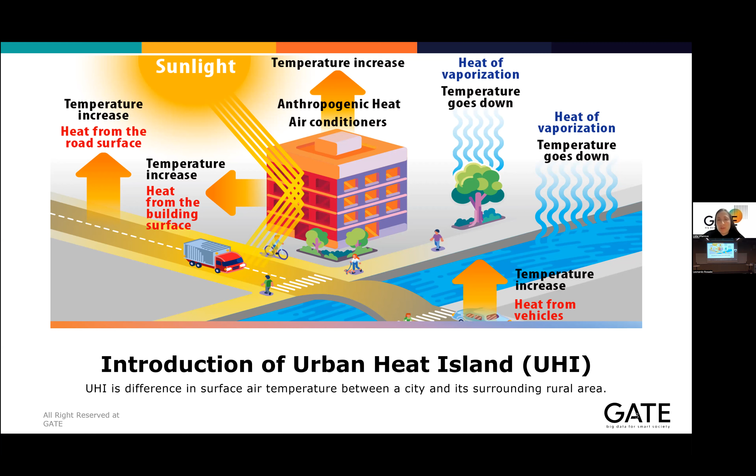So maybe all of you know about this phenomenon or problem related to the urban heat island. Actually, urban heat island is a phenomenon that we can consider as the difference in surface air temperature between a city and the surrounding rural area. So what are the main factors that influence urban heat island? There are a lot of factors that we can consider.

One of them is the heat generated by human activity, rise of energy consumption, traffic increase, reduction of green space and parks. Also, when we have increasing urban development or lack of water bodies, some poor urban planning, we have also increasing local temperature. Another problem is overpopulation, poor use of common and unused areas, use of inappropriate building materials, and last but not least, the influence of the local climate and topography.

Actually, this is a key point because when we try to investigate some problem in the city area, we have to start from the basic or unique point in the city. That's why this last part, influence of local climate and topography, is very important when we try to investigate the temperature or some problem in the urban area.

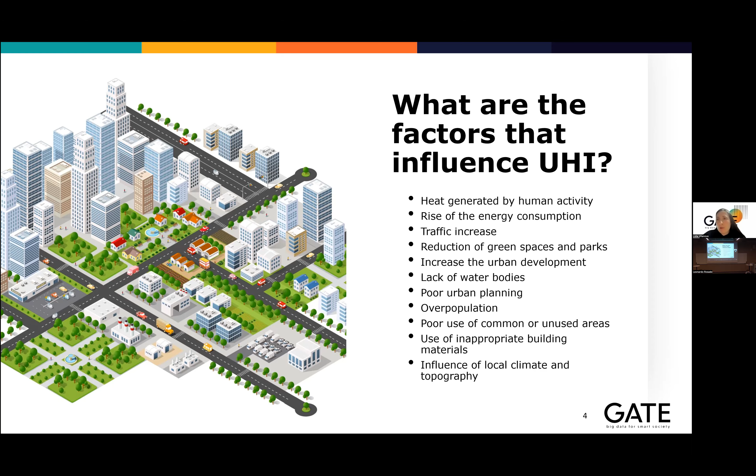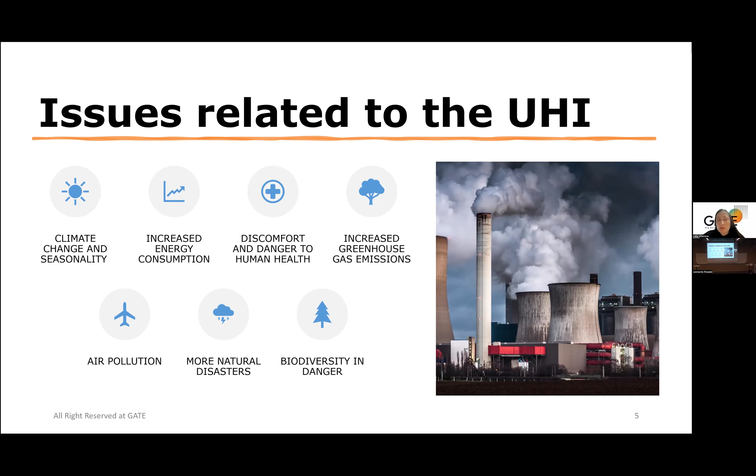So issues related to urban heat island: unfortunately, we have climate change and seasonality changing due to increasing temperature and global warming, increased energy consumption, discomfort and danger to human health, not only in the summer but also in other seasons. We have more and more cases of heat stroke, increased greenhouse gas emission, air pollution. We have more natural disasters. Many studies have already shown that because of the urban heat island and increasing temperature, we have increasing precipitation and natural disasters, and also biodiversity in danger.

That's why the important thing is that we first understand the basic temperature, the problem that already exists. And based on this existing problem, we try to investigate more deeply and in detail the study case in our city. So this research focuses on the capital of Bulgaria, Sofia city. We try to numerically estimate the urban heat island, not only in all of Sofia, but also in each neighborhood.

So another unique point in our study is that we don't consider temperature as just temperature. We think the temperature consists of, for example, the impact of energy consumption by buildings, impact of energy consumption by traffic, impact of the land use, of the population. So we try to consider all of these impacts separately in order to understand what happened in our city.

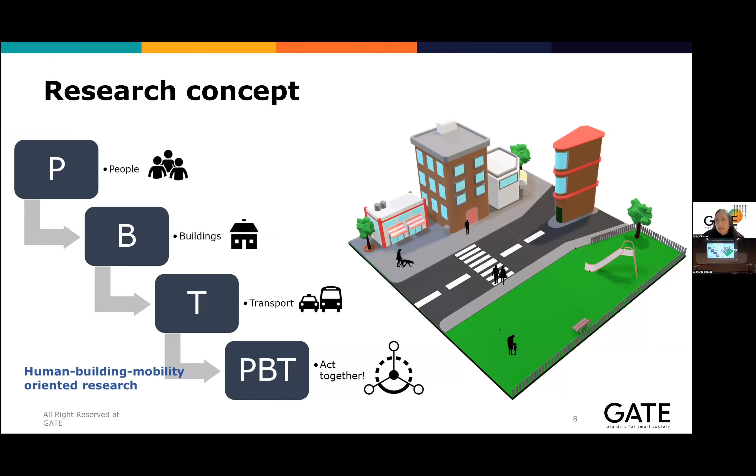So first about results, this is for the people. Before we try to make some simulation, before we try to get some result, it's important we investigate the current situation in our city. That's why we try to create the land use map. This land use map we get from the Copernicus project. This data used for the land use map is gathered from two sources.

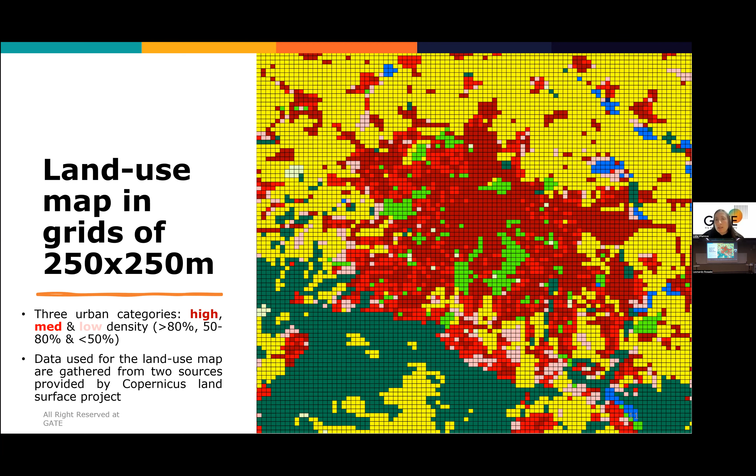And in this land use map, that is 250 meter resolution, we already categorize our urban area in high, medium, and low density area. Then another input data we're using is the building data. Actually, this is the first atlas in Sofia that we have created, 2D distribution, high energy scenario. We already created a low, high, and medium scenario. And the idea of this atlas is first to see what is the energy consumption of the whole city, depending on the different type of the building.

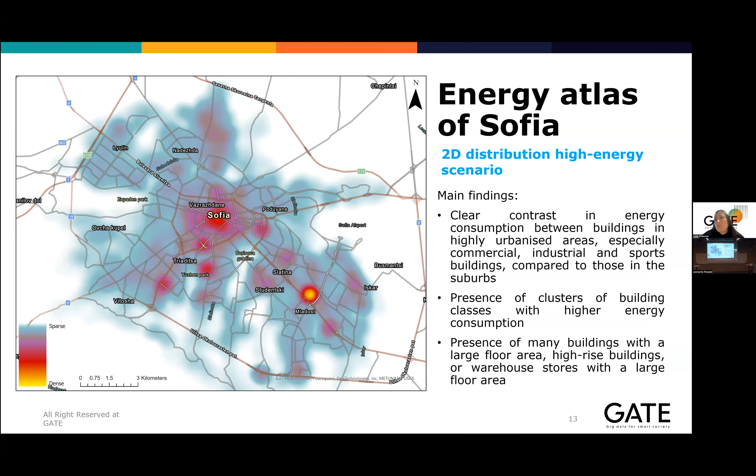And then we focus on some specific area. For example, in the central area, we try to see where is the hotspot in the building energy consumption, depending on the type of the building. For example, we try to analyze what kind of building there is in the area, what is the age of the building, what material they are made of, what is the main cause for the energy increasing. Because this is very important when we try to simulate the model in order to investigate urban heat island, and because there is already a known connection between energy consumption and the temperature distribution in the city area.

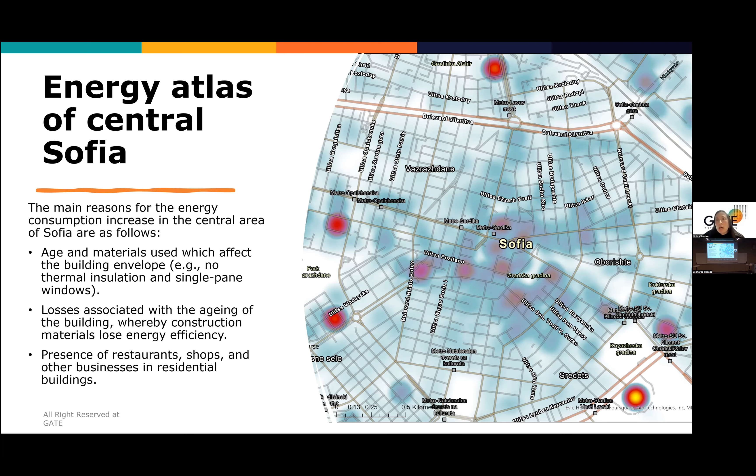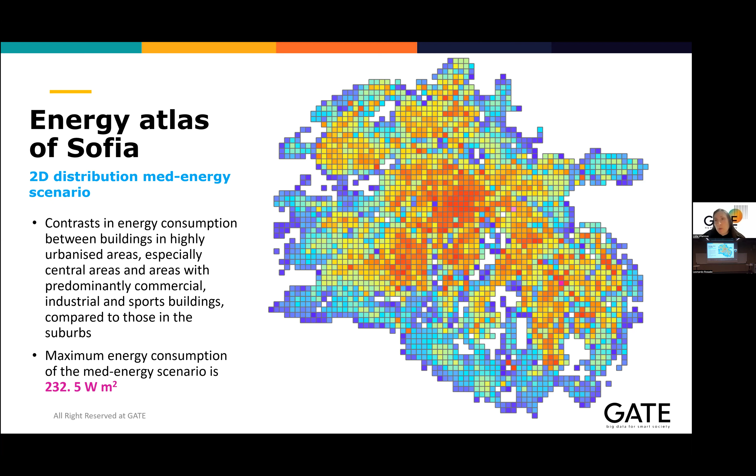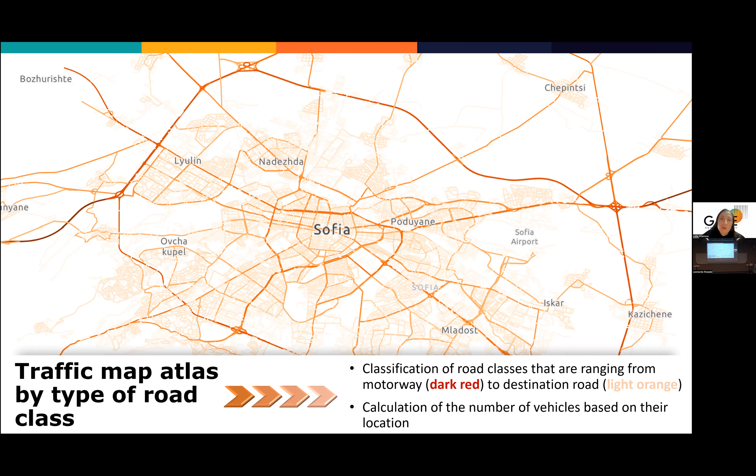And about transportation, this is an ongoing result, we try to make a traffic map atlas in order to understand what is the energy consumption by traffic in Sofia. So here you can see classification of the road class, ranging from the motorway to destination road. And then the next step is we try to calculate the number of vehicles based on their location.

And another important thing we have to mention is the application of the research outcomes. Our research, as multidisciplinary, has a lot of outcomes. For example, one of them is we try to investigate and understand the impact of urban heat islands. Based on this, we can understand the heat risks, thermal comfort, what is the energy efficiency in our city, what is the solar potential, try to enrich the 2D, 3D data, also focus on urban health and lifestyle. Then we can create some risk maps to see what relates to disaster and mortality, heat index, of course air quality, transit-oriented development, which is related to mobility, and of course the local climate.

And as a future step, we try to create an energy consumption map from vehicles. We try to estimate, as I already said, the urban heat island in the whole city and partly for each neighborhood. Create a risk map. Consider a future projection of Sofia together with the University of Tsukuba in Japan. We try to make some future scenarios, and of course, enrich the 3D city model in support of the research on the urban heat island.

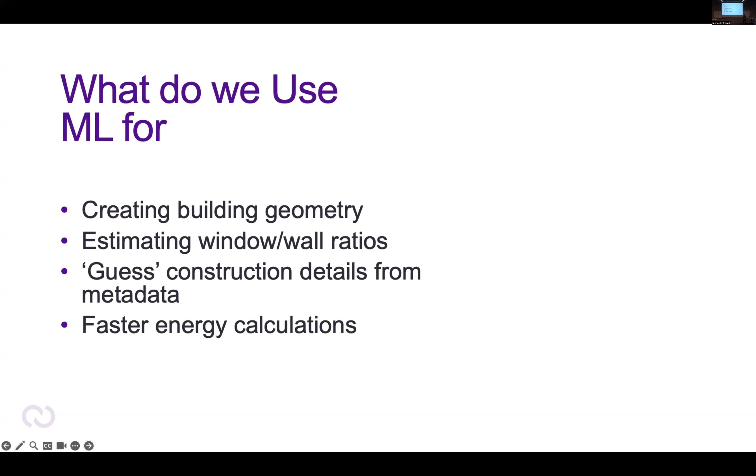So machine learning has lots of uses here. We use it for looking at building geometries, window to wall ratios, trying to guess construction details from metadata, and also for speeding up the actual final energy calculations that we use.

So most of my research and my interests is large scale urban data. What we have is generally aerial photographs, 2D building footprints, and point cloud data. So I like focusing on data that I can get for large areas, like cities, countries.

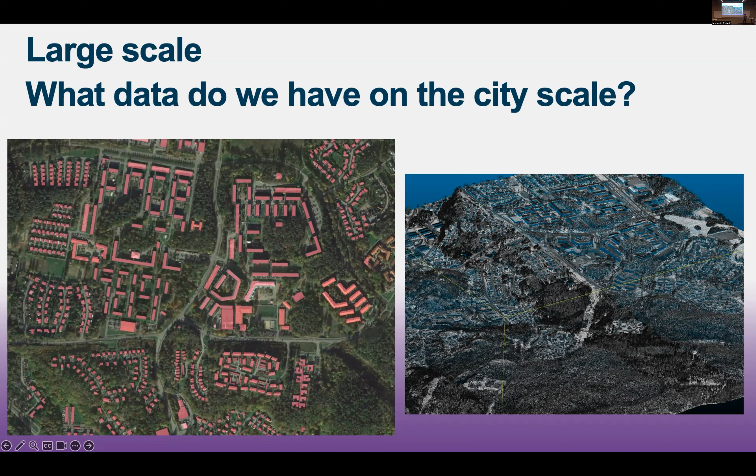I like developing models and methods that can be applied to a country, or at least any city in a country or Europe, rather than focusing on one building at a time, or 10 buildings at a time, where you have the ability to go in and collect more detailed data.

So the first aspect we use machine learning for is building the roof models from a combination of aerial photography to get roof details, and then combining with the point cloud data, because at least in Sweden, some cities have high quality point cloud data, like 16 to 32 points per square meter.

This is much easier because there you can really go in and extract the planes very easily from the point cloud data, because it's very accurate, very low noise. But when we're looking at the data that we have for all of Sweden, we are looking at on the order of 2 to 4 points per square meter. And also it's quite noisy, and often the vegetation and the buildings are not separately classified.

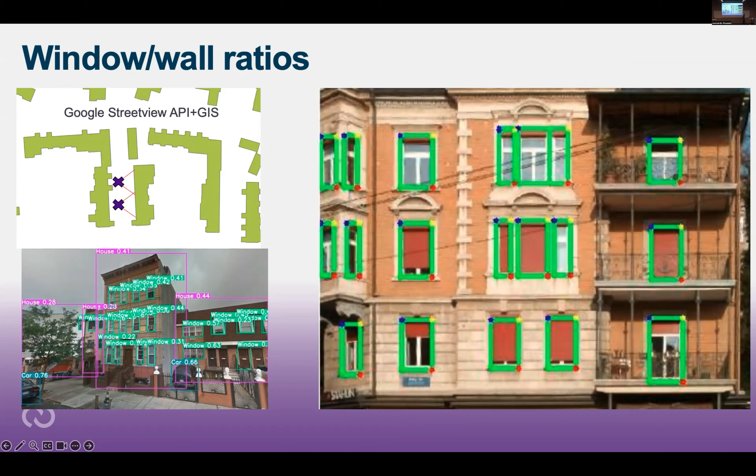So then we count the number of pixels that make up this facade and correlate that. That gives us, okay, this is 6 meters, it's 433 pixels, and we get how many pixels per meter, and then by going back and forth, we can eventually find out exactly how many square meters the whole facade is, sum up the windows, and then we can get the window to wall ratio.

Another important thing is that when you're doing the energy, what's really important is what's inside the walls, what's inside the roof, what the windows are like, the U value of the different materials. And this you cannot get just from an image by doing image recognition. Sure, you can recognize, okay, this wall is concrete, or this roof is whatever, but that doesn't really tell you anything useful.

So it's actually the metadata about the building which is really more important than geometric data. So here we have been looking at a clustering approach where we have various databases. We have databases about energy uses, and databases of what typical buildings look like in Sweden or Europe, depending on when they were built and the material. And we have some buildings that we actually do know a lot about.

So the idea is to use machine learning: we have a small collection of buildings that we know a lot about, and a lot of buildings that we don't know anything about, and then we use a clustering algorithm to map the buildings we don't know anything about to their nearest neighbor, from an energy and building material point of view, to guess how the building is built and to get the U values. Because without that, you cannot really do a useful energy simulation.

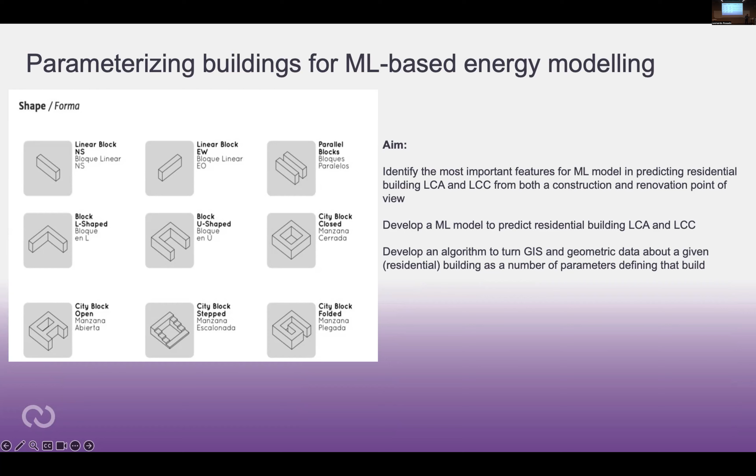Then you can go in and describe everything else about the building, like the dimensions, staircases, room lengths, some internal dimensions, windows, U values, everything here. The idea is that instead of working on a geometry, what you're training a machine learning model on is basically just a vector of numbers, and that's really easy. That's what machine learning algorithms love. They love taking a long vector of numbers and returning a short or different vector of numbers.

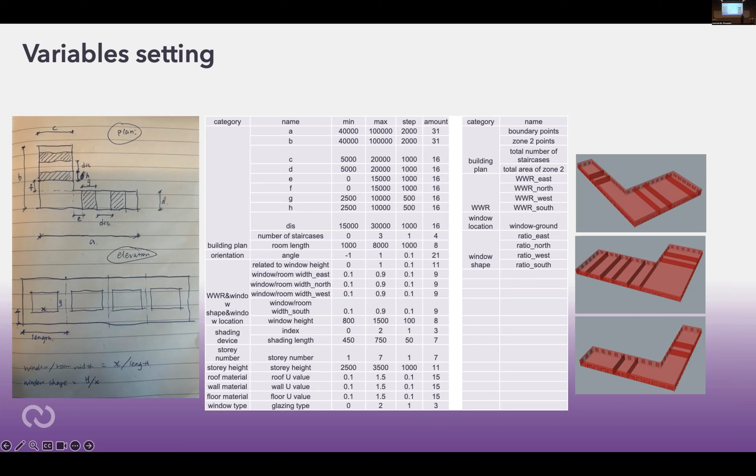So from our parameterized model, we can get very accurate, close to what EnergyPlus says the number should be. However, the next step is: is what EnergyPlus says the number should be actually what the number is in the actual building?

So there's work there, because when you parameterize a building, you simplify it a lot. So the risk is that we are oversimplifying the building. We have to make sure we don't oversimplify the building to the point where it doesn't actually represent the original building.

So there's like three steps. There's the actual building, there's the simplified geometry of the building, and then there is our parameterized description of the building. The connection between the parameterized description and the simplified geometry works very well. So now we just have to make sure that the simplified geometry is actually a representation of the building we were trying to simulate from the beginning.

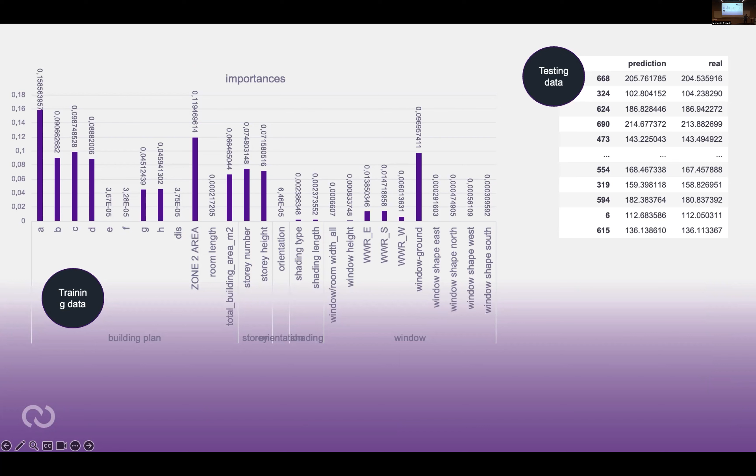And this is our long-term vision of collecting together all of these disparate parts of this project: to be able to go, in an automated way, from drawings of buildings, often 2D, which can be 100 years old, but we also have good GIS data, we have image data, and is there a way to combine all of this and actually get out a complete BIM model?

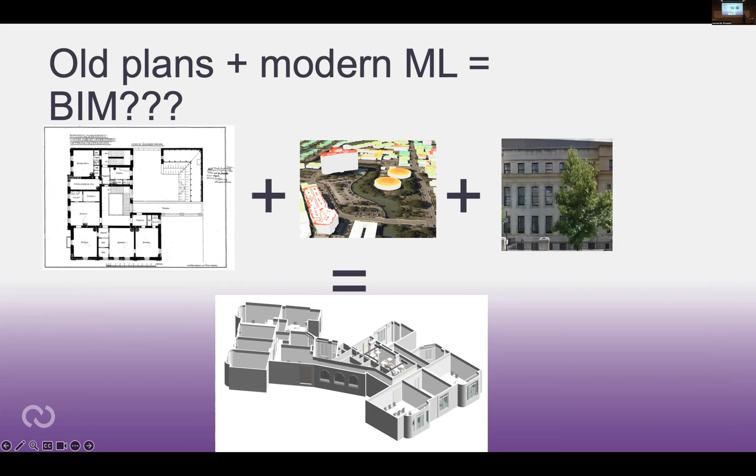It's far from solved, but this is kind of the holy grail, as it were, of this research that we are doing. We've got bits and pieces along the way. We can take drawings and extract lines, we can take point clouds and get roof shapes, we can get windows. But the point now is to combine all of those parts into a single model.

And then build a tool for actually going in and exploring this data. You go in a map, you click a building, you get information about the roofs, you get all the images, and then you can run the simulations and get the energy data. Because, coming back to the beginning, what we were looking at was also energy renovation.

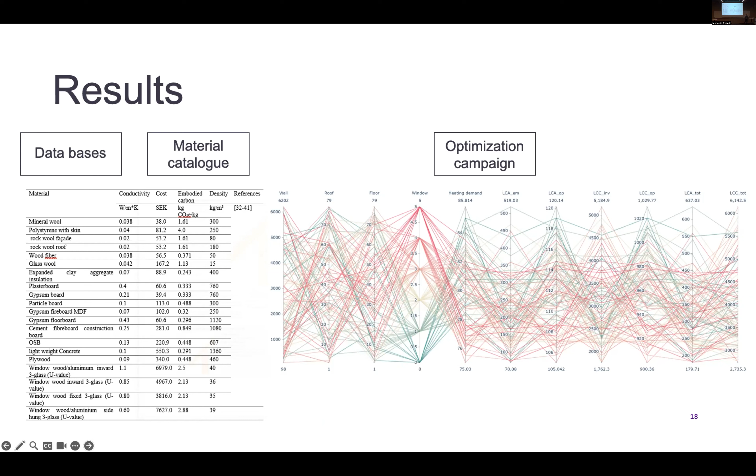So by doing all of this, if it's fast enough and easy enough, we can run lots of different simulations with lots of different combinations of materials to see which materials provide an optimal approach, depending on what you want, like your LCA, your LCC. By being able to do this quickly at a large scale, instead of doing it building by building, you can do it city by city and look at what we can do on a city scale or even a country scale.

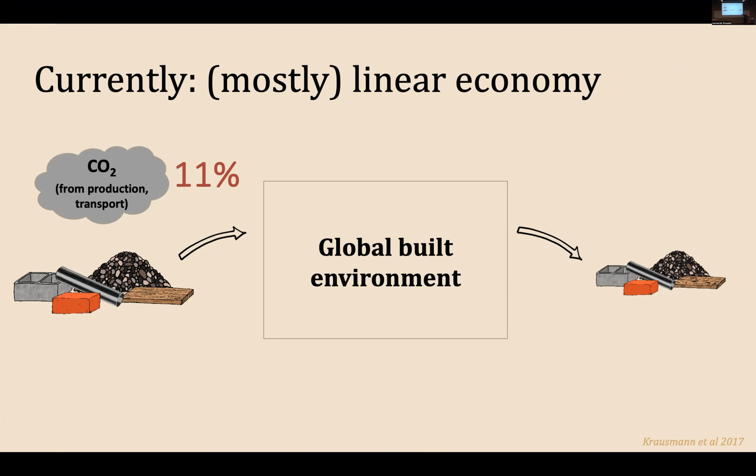And meanwhile, we are also discarding a lot of these materials and then taking more from the earth. So the idea with the circular economy in this situation would be to take the outflows and bring them back to the inflows. That way we need fewer resources at the beginning and thus have less embodied carbon.

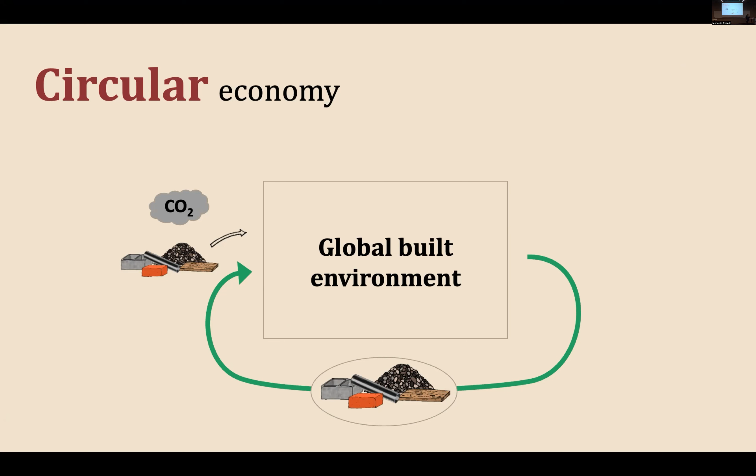So in terms of what we can do to really help the construction industry would be that we map out where all these resources are in the built environment, what type of resources, where, how much, in what shape, and when will it become available. So ideally, we would have a digital twin like this for the whole construction industry. And if you click on a building, let's say, you know exactly what's in there, when is it going to be available, and then you can plan your construction in your city accordingly.

Obviously, a bit tricky to do. And there is a strand of research that is called material stock modeling, where we try to characterize this amount of construction material and also trying to see how detailed really can we get. And this is what I want to show you today. And we stole the concept of level of detail, LOD, that is very proper to digital twin. This is also for the sake of this presentation to run through it.

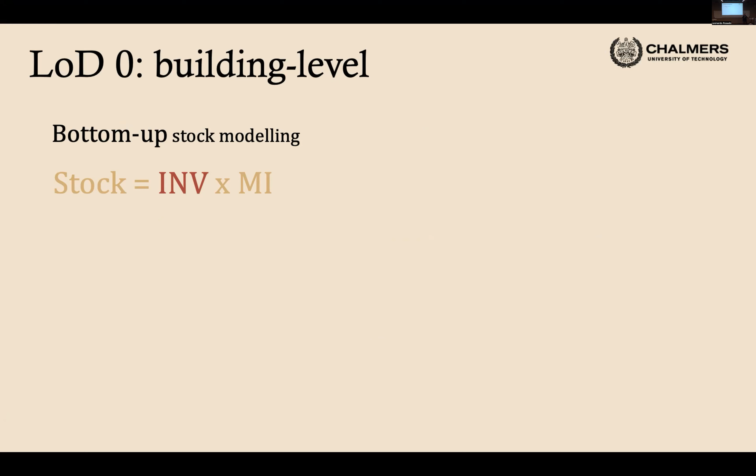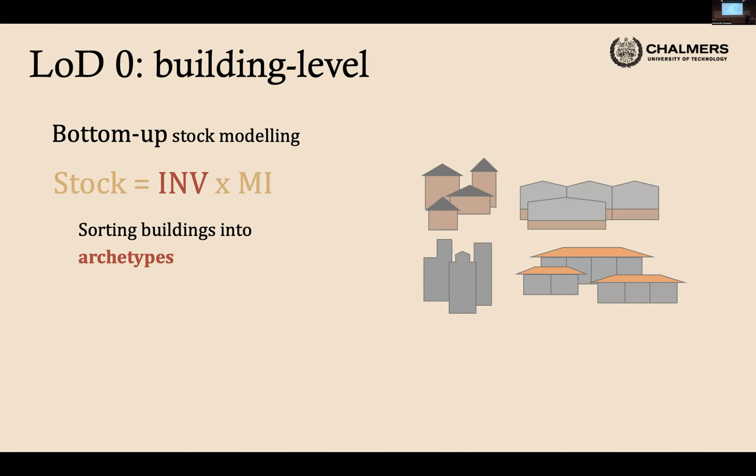So the LOD 0 would be having an idea for each building, what kind of material do we have there. And this is done through the bottom-up stock analysis. And what we do is we know what buildings are out there. That's a building inventory. And buildings are all different. So we cluster them in typical buildings. And then we need to check on average how much material is in there. That's called the material intensity.

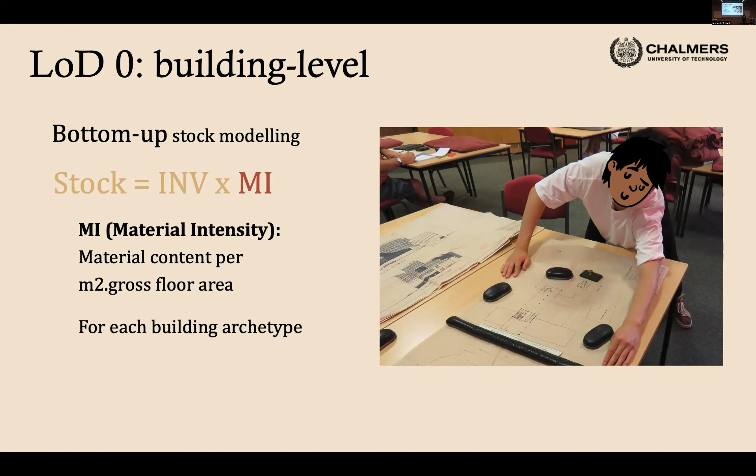And to do this, we go to archives. So I've been to different archives with my students. We take pictures of very old building plans because these are the interesting ones that will be demolished soon. And we need to understand what's in there. And we take pictures and then we scale it and we calculate. And we look at old description and specs when we have them, or we make assumptions on what was used back then. And with this, what we get is what we call the material intensity coefficient.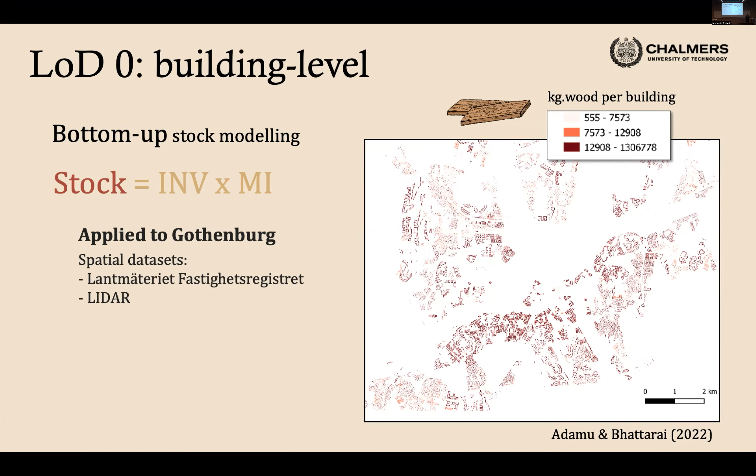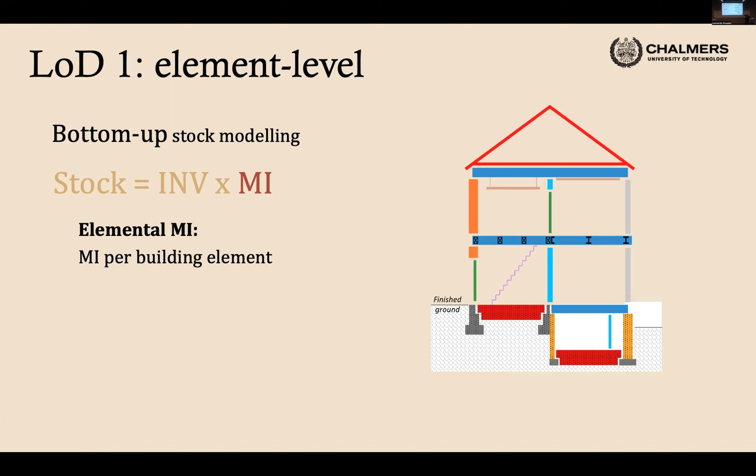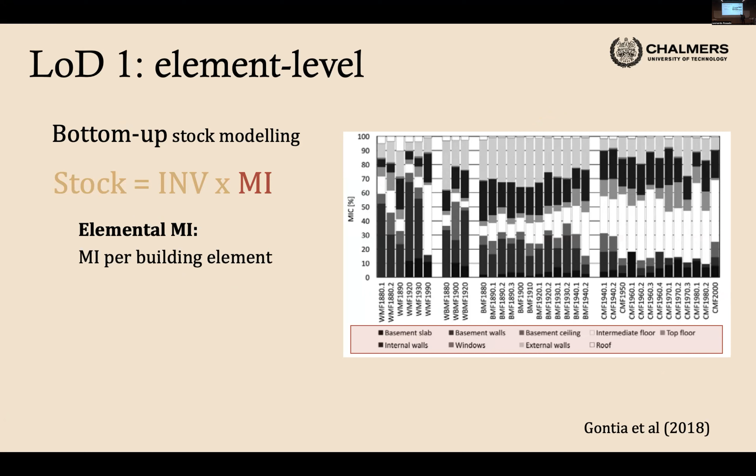Issue that when we go to construction actors and give them that, it's nice, but there is little they can do with this kind of information. They need more details. So we are looking at going at a higher level of detail. And this all comes down to how do we collect our data for the material intensity. So for Gothenburg, we have already disaggregated this data. Instead of taking the average for the whole building, we try to map out, okay, in which element of the building is this? Because if we know where the timber is, and we disaggregate it, then we know how much is in the basement, how much is in the floors, how much is in the top floor, etc. We can again scale this up and know, okay, actually we have wood in floor and roof in these parts, in the old residential in Gothenburg.

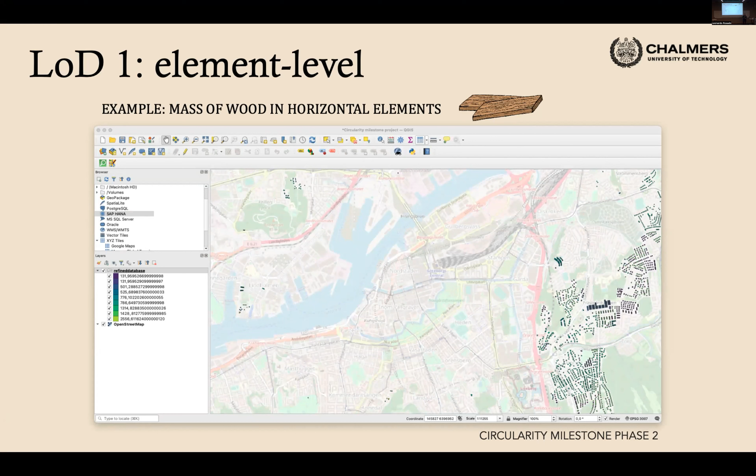Again, that's good, but not enough. We are talking about circular economy, and we need to know when this will become available. And knowing that it's in the roof is not really helping. What we need to know is where is it in the building exactly, in terms of what we call, I'm going to skip a bit, sorry, what we call building layers. The layers of the buildings are tied to how long the material stays in use.

So if a material is in the structure of the building, it is likely that it will stay as long as the building. If a material is in the skin of the building, so the cladding, it will probably change quicker. If it's in the space, so let's say the partition wall, if you decide to change the inside of your building, you will have a quicker turnover. So knowing where the material is in terms of layers helps to model the future and understand better what will become available when.

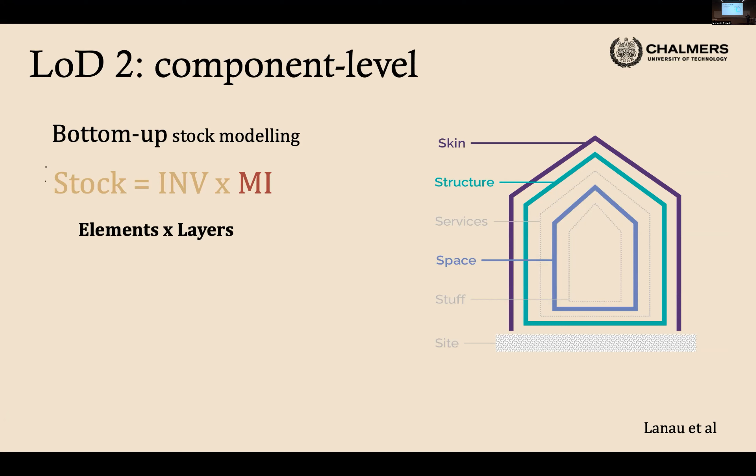That means that when we go through these building plans, etc., we also need to tag in which layer the material is. And we are doing this right now, so it's obviously rather data intensive. But I had a student do this for the residential buildings. So she reran all the base data through which layer and element it is. So you can see here that we now know where all these materials are across the elements of the building and across which layer.

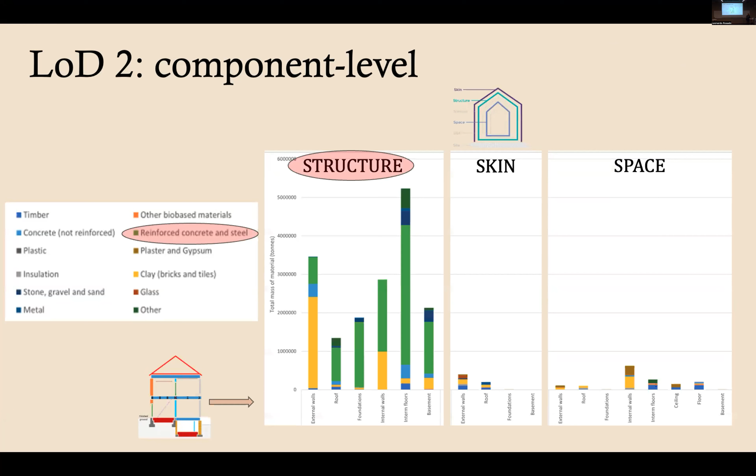And that way, what we can do with this is apply scenarios of lifetime of these. So if we take the structure and the reinforced concrete, and we assume a lifetime for this, and we apply a normal distribution with different parameters, we can have an idea of how much concrete and steel will become available from the current stock in the future.

We have a bit of an issue here in research in that we have very bad lifetime data overall. Lifetime is not something that's been much recorded. So now we are looking at demolition, trying to get an understanding of demolition curves and survival ratio, etc. But the modeling concept is there.

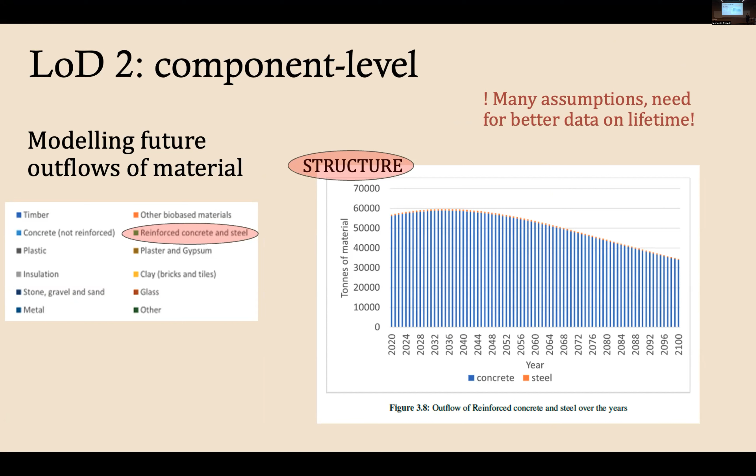And again, if you go to actors, depending on which actors we're talking about, for a municipality, this might be interesting for urban planning. If you talk to an architect who is already designing the building and needs to know exactly what will be available now, this is not enough detail. So you have another level of detail again, and that's to complement all of this with AI. And you've seen AI already, and Josie will talk to you more about AI, so I shall skip it.

And the next, and the holy grail, as you said, would be to have a bill of material exactly for each building. This exists to some extent with new buildings that are modeled with Revit, and then you can quite quickly export the bill of material. For older buildings, that's more tricky. So we have some of those for Gothenburg, but not all. So material stock modeling, different levels of detail. Different details give you different information and can be or not be useful depending on the actor.

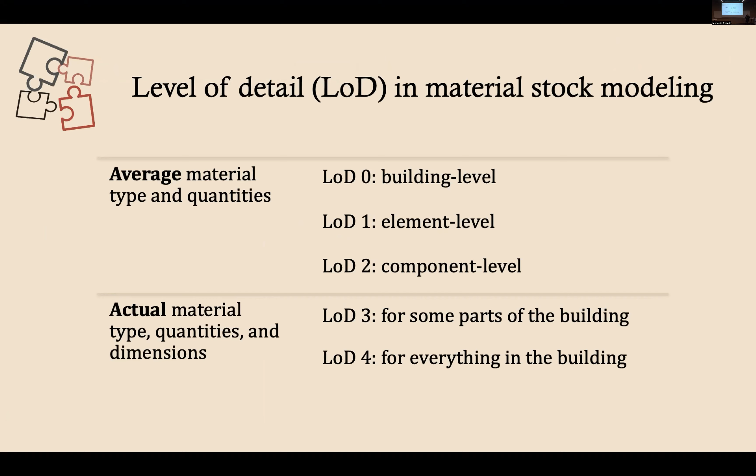So the idea, the workflow we have is to take this whole strand of bottom-up stock research up there, kind of averages, even if well disaggregated, still averages, to show this in the digital twin as a baseline, and then over time complement this. Because that way we are not waiting to have a perfect exact modeling of Gothenburg or the city, but rather build on it and become more and more accurate. And of course, then you would say, okay, that's level of detail 3. This is how we got data. You can assume this is quite reliable or so reliable.

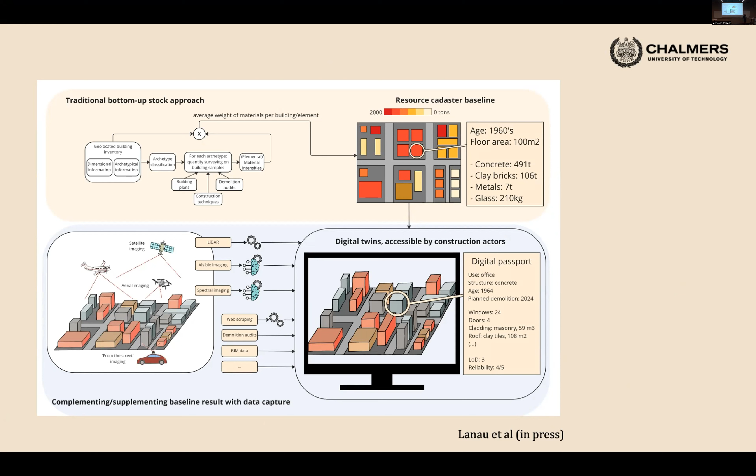Now, a very last thing I want to talk to you about that we are working on quite actively is, when we have this, exactly what functionalities, what information would different actors want to have. And this is a European project we are working on with Leonardo and other colleagues. We have 3 case studies. One is Gothenburg, one is in the Netherlands, and one is in France. And we have the same kind of data, not exactly, but basically we have an understanding of the stocks. And we are collaborating with different stakeholders, trying to say, okay, if we had this information, what exactly would you need to know?

And this work here is really to try to understand through kind of mock-ups of tools, would that be useful for you in your decision making so that you can really support the circular economy? So this is a mock-up, for example, but if we imagine that we really have a good understanding of our buildings and the materials in there and when it will become available, how would you as an actor use this? What would you need?

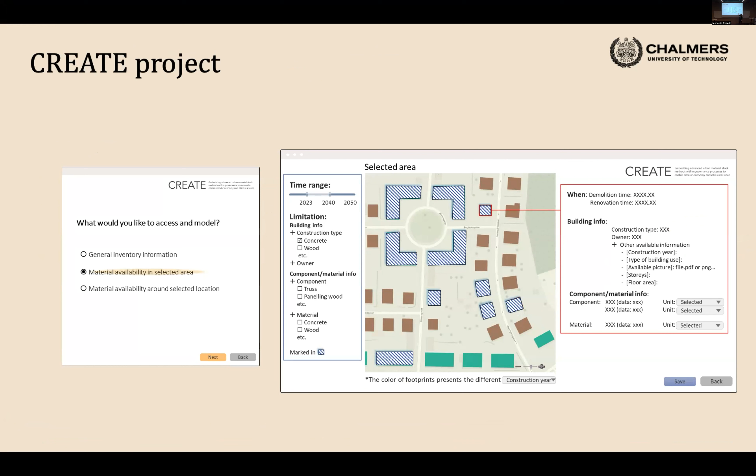And yes, as a quick conclusion, I think the digital twin is really full of opportunity to support circularity. We can diversify data sources and integrate all of them together as well. But it's also big on visualization and communication and getting stakeholders to collaborate across the value chain. Yes, I think that's it.

Thank you, Laura. So we have time for one question. Yes. Yeah, sorry, Mina.

I'm just asking as an engineer, what about the quality of materials? We are very poor at characterizing the state of structures and materials. Yes, definitely. I think we can have some rough understanding depending on the age, if you will have asbestos, for example. But then there are other techniques with machine learning, like for the state of concrete, for example, and different methods.

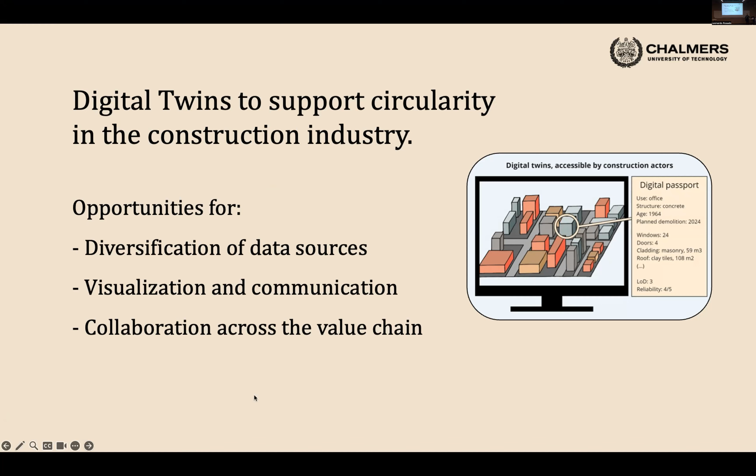But at the end of the day, of course, you most probably need to go into a building and double check. So the point of this is more to prepare for a wide-scale circular economy. But yeah, at the end of the day, you do need to go and check the building and check the quality. But I agree, this is a question that pops up a lot in this research. Thank you.

Maybe you can, very fast. So you mentioned at the end about the stakeholders. How far do you think we can go into an idea of creating a marketplace of this material? Because at the end, this material can be recycled and reused, to your first slide. So do you have stakeholders that are thinking in that way, in the marketplace way?

Yes, there are, and they are always very keen to see this kind of work, of course. A few years ago, I was working in Denmark, and we had stakeholders who had made a new material, a mix of concrete and clay, since Denmark has a lot of clay, and they told us, please give us any kind of estimate, because right now we have no idea, actually.

So for their business model, it's really complicated. Even if they know they can make that material, they don't know to what extent they can go with this. So my understanding is anything is better for them than the no information they have so far. Yeah.

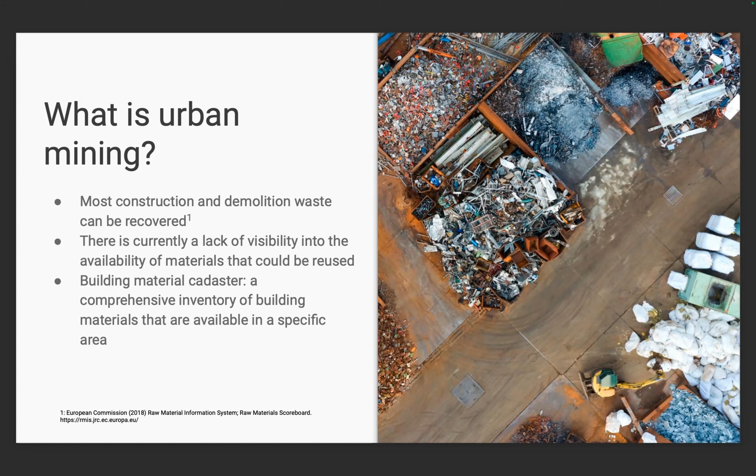Many researchers are using computer vision to potentially create these building material cadastres using Google Street View. Computer vision is a type of machine learning method, and machine learning is basically a reversal of the traditional knowledge mining process. In traditional methods, a researcher would manually explore relationships between the variables they are interested in. If they were interested in the relationship between X and Y, they would use their domain knowledge to first choose X and then identify additional variables that could influence the relationship. This leads them to have very deep knowledge of the inherent logic of the model.

But machine learning is data-driven, which means that the model is able to calculate the relationships itself with very little guidance from a human. Machine learning finds patterns in the data, makes models from those patterns, and then creates predictions from those models. Since we're allowing these models to make the calculations themselves, the evaluation becomes more focused on the model's performance rather than understanding its inherent logic.

Earlier this year, there was a very nice article. Oh, that's too far. There was a very nice article published by researchers from ETH Zurich who asked the question, can we use computer vision methods to extract material information from Google Street View images at a city scale? This article was published with a labeled data set and code that can be used to recreate the experiment.